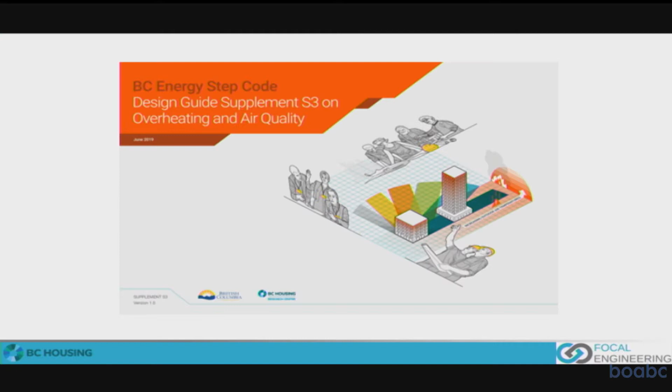So this is the actual supplement itself. It's freely available on BC Housing's website. It's a really nicely put together document — Hughes Condon Marler Architects has an illustrator on staff who does fantastic work, so it really helps present the information with nice, clear graphics and layout, easy to understand and follow. It's really nice work. That's the guideline, which is a directive for BC Housing.

It's all... social housing? No, not necessarily.

BC Housing has design standards and construction guidelines, which is the document that specifies their actual requirements. This is a supplemental guideline — it identifies the issues we're trying to address and some strategies for achieving those, without necessarily laying out requirements itself within the document. Wilma from BC Housing, please correct me if I'm wrong... Yes, that's right. So if you go to the BC Housing Research Center and just type in 'energy step code,' this will show up.

Let's start with a little bit of background as to why we even built this resource. The climate is changing. We know that, I hope we all agree on that. The climate is definitely changing, but how is it changing, how much, and how will that affect how buildings are designed?

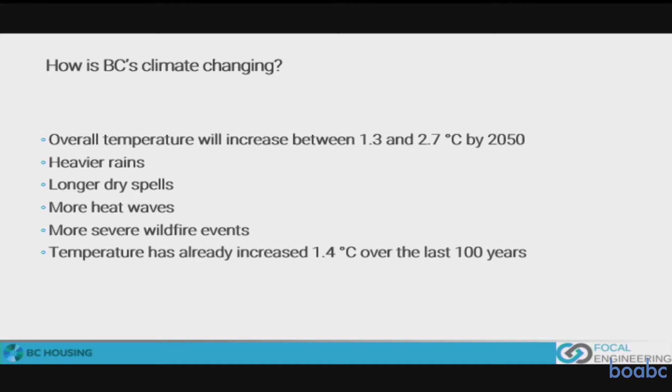We have an overall temperature increase projected between 1.3 and 2.7 by 2050. The range there we'll talk about a little later in the presentation. There may be heavier rains, longer dry spells. Certainly I feel like I've experienced that. I live in Victoria, and in the last few years there have been some moderate drought conditions, even on Vancouver Island, which you'd think would be full of rain, but not necessarily.

More heat waves, and I think that's particularly of interest for the design for overheating, because even if your overall climate is fairly cool, if you do have that one extreme heat wave, that could be a problem. So we need to be aware of that. More severe wildfire events, definitely happening. I think we're all pretty aware of that with the smoke in the last couple of years. And of course, we have evidence that the temperature has already been changing over the last 100 years.

So what does this do for buildings? How does this relate to how we design and occupy buildings? Well, there are certainly some occupant health and safety concerns. You have issues with potential overheating, you could even have people die, right? If you have someone that's completely overheated and unable to open their window or get help, if they have perhaps compromised health already. You have impacts on energy consumption.

As the climate changes, you maybe have some more cooling energy or fans, et cetera, or maybe less heating. That's another thing to think about too. You have some financial risks to building owners, particularly related to costs of upgrades later. Like maybe a building wasn't able to provide adequate air quality or comfort. They may need to retrofit that building later to provide cooling. That would be an additional cost, not to mention other issues related to more extreme events like heavy rains, et cetera, that might actually damage buildings.

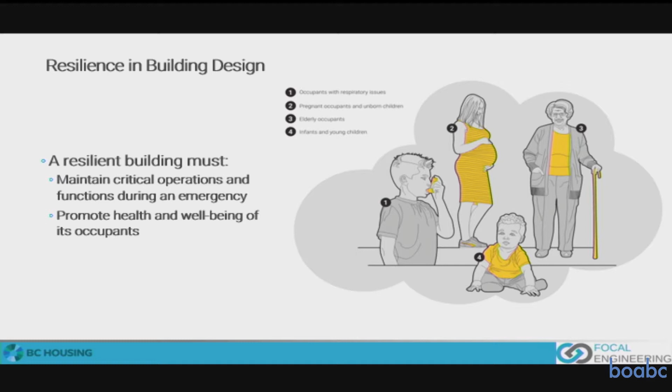In developing this guideline, there was a lot of discussion around resilience in building design. I didn't exactly know what that means, and I still think it's a little bit of a nebulous term. Resilience in what way? I think a building could be resilient to either extreme weather events, it could be resilient in terms of structure, it could be resilient to fire.

But of course, then you're looking at resilience in terms of its ability to house its occupants in a safe way. So you may be looking at having ways to mitigate smoke events getting into the building, mitigating overheating. One issue that gets talked about is that every building, or with a multi-unit residential building, for example, if it did not have cooling, then there should be some portion of the building that can act as a refuge during a heat wave event. So those are the types of things that come up when we talk about resiliency in building design.

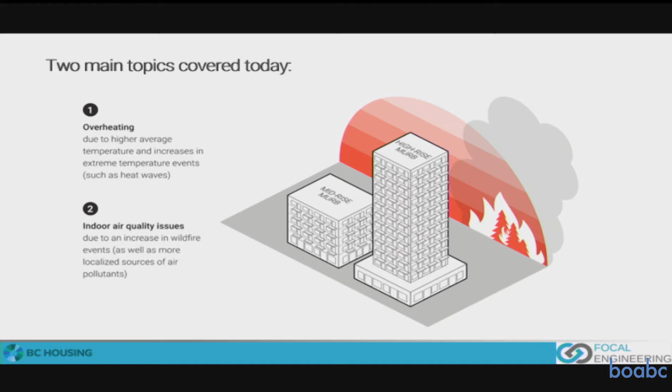So we'll start with overheating. What is overheating? I think everyone understands, yes, too hot. But too hot, how hot is too hot? And how does this happen?

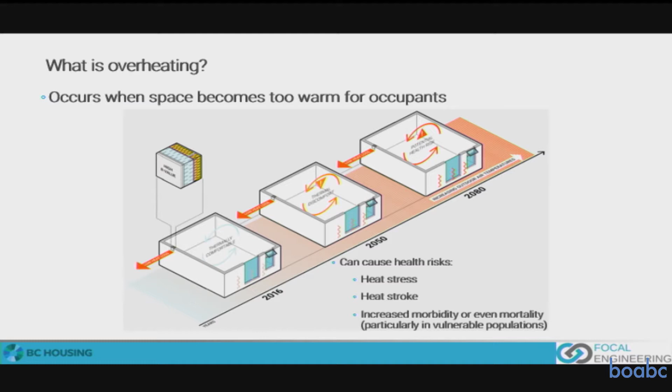We're thinking about this through the lens of not only current climate and building design, but future climate and changing building standards, and how those two intersect and maybe create additional risk for overheating. In this diagram we're looking at an increased performance of the envelope. Maybe it traps more heat in the building and the climate's getting warmer. These two things create a potential risk for additional overheating in buildings we're designing and building today and in the future.

Generally, we have internal gains. These are all the things generating heat inside your space. You have cooking, your microwave, your fridge, your water cooler, computer. Those are all plug load internal gains. Those aren't things we can necessarily control; people will have these in their buildings, and that's just the way it is. You can't really cook, especially with an electric stove, with any less energy than it already takes.

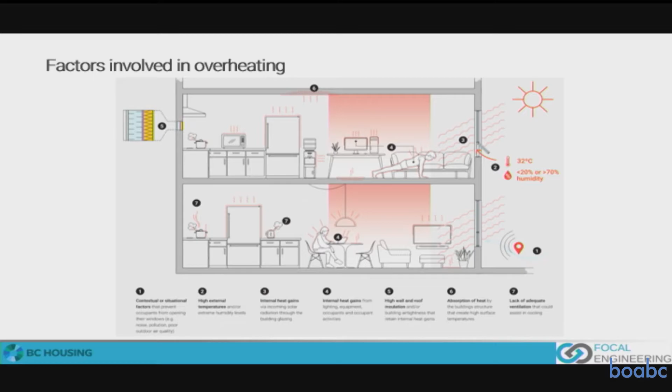If you talk to some people, myself maybe included, I might argue that adding more insulation to a building may not necessarily increase the risk for overheating. If you talk to people that design passive houses, they would say there's no additional risk for overheating in a building like that. That's not necessarily the case, and I've actually played around with some simulations myself to evaluate this. But the general concept is that there is a risk that with a more insulated building, you will retain more heat, and then you can have more risk for overheating.

But what it really comes down to is, are you able to get rid of that heat at night? If you have a building that you're not able to cool down at night, it will start the next day warmer, especially if it was more insulated, and then you'll be at a deficit - starting at a warmer temperature and overshooting higher. So it's not always an additional risk, but it is something to consider and understand.

If you have a passive house all designed properly, ventilated with air pipes, you don't have interaction with outside air, which is harder in summer. So in a way, I don't know how it relates with the insulation, because a passive house will have that kind of insulation - probably not the regular ones where the code isn't even required to have that much insulation. But in a way, what is the scenario here?

If that is not passive house, but it just design over insulation more than what is required, then probably this adds to the overheating aspect? It has a potential to, yeah. I think that's the main message, is that it's one of the factors included. It will affect how much heat is left in the building or is conducting in from outside. It could help in that case too. Like if you have a lot of thermal mass in your building and you're able to keep it cool by night ventilating it, letting it cool down to the outdoor air temperature at nighttime, and in the daytime if you're able to close your windows and keep it tight, then it'll stay cooler. So it could be a benefit.

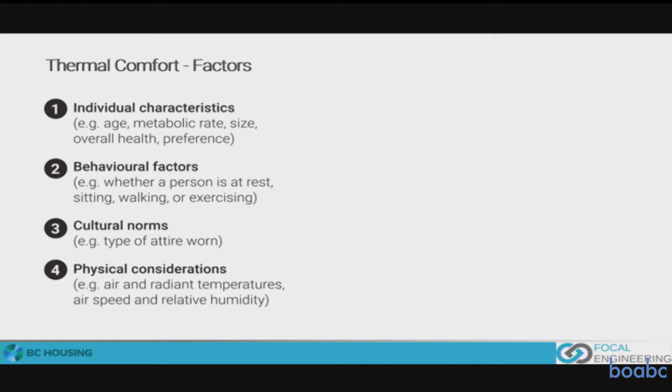So thermal comfort is, I think, quite an interesting topic. There's a lot of science involved because ultimately it's a perception thing. Like why do I feel warm or cool when someone else doesn't? It has to do with your age, your metabolic rate - some people run a little hotter than others. It has to do with your behavior, your level of activity, and of course how much clothing you're wearing. Some people wear different levels of clothing for a variety of reasons. This all affects heat transfer and what we perceive as our own thermal comfort.

Some of the physical considerations are, of course, we typically talk about air temperature, but air temperature is actually less important for your perception of thermal comfort than radiant temperature - the temperature of the surfaces around you. The reason we can use air temperature alone as a metric is because in most places like this room, the surfaces are all going to be more or less the exact same temperature as the air. If you're next to a window, however, in the wintertime that window will be cooler and you'll feel colder; in the summertime, conversely, it'll get hot in the sunshine. So there's a lot more to it than just air temperature, which is good to know, although using air temperature as a proxy for total thermal comfort is acceptable in most cases.

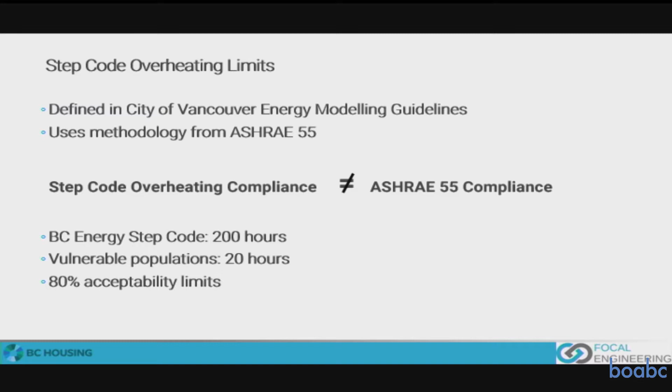The truth of it is that it becomes very complicated to try to delve into all these factors. So as a result, the STEP code has introduced some overheating limits. These overheating limits are sort of a modified thermal comfort metric that's based on ASHRAE 55, a standard for thermal comfort of occupants in buildings, but it is not equal to it. So that's an important distinction - sometimes we have that confused. We've seen some clients saying, oh, we need it to be compliant with ASHRAE 55. Well, if it's a STEP code project, no, that is not the requirement, and it's good to understand the differences between them.

The BC Energy STEP code has a limit of 200 hours, and again this is summarized in the City of Vancouver modeling guidelines. That is the upper limit - you're never allowed to have more than that. We'll talk about what these hours are. There is also some language in there for 20 hours of overheating for vulnerable occupants, so maybe an assisted living facility or something like that, where you want it to be a bit more comfortable since some people may be more at risk.

These limits are generally based on an 80% acceptability in ASHRAE 55, which means that 80% of people will say that's more or less okay, but that's not everybody.

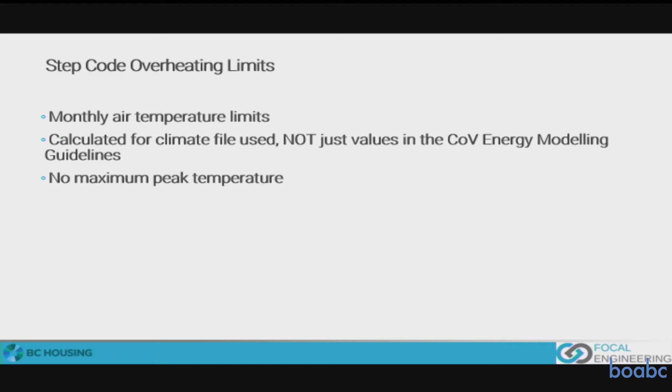So the way that these are actually determined in practice is that there's a calculation that looks at the average air temperature in a month. Based on that, and this calculation from ASHRAE 55, you come up with a maximum temperature for that month. The idea here is that this changes throughout the year because humans are pretty good at adapting. There's a lot of research that shows adaptive comfort models are very useful and accurate. So we're more accepting of a higher temperature later in the summer because we're more used to it. Similarly, if you lived in a hot climate, you would be more accepting of a higher temperature.

The other thing to point out here is that the City of Vancouver modeling guidelines that talk about overheating limits list values for each month, this is what your limit is. If you're not in Vancouver, those are not the right numbers.

So your modeler needs to calculate those from the climate file that they're using. That's important for building officials to know, so in the reports you're getting from your modeling team, if they're listing overheating hours, it should also state where those overheating limits came from, and you should double check that they align with the climate file.

It's based on the actual climate file. So the process would be, here's your project, say it's in Grand Forks. You go to Grand Forks, look on a map. There's a website called EPW Map that shows weather files on a map, and you find the nearest CWEC 2016 weather file. That's the type of weather file we're mandated to use for step code modeling, and you use that file for modeling that location.

It's not necessarily one climate zone per climate file. In fact, you have a huge variety of climate files for one climate zone.

Another note is that any hour a room is over the limit is counted as one overheating hour. There's no consideration of how far over, no maximum temperatures given. So even if your overheating limits are met, you may still have peak temperatures for a few hours or a day that could be problematic. That's something else to consider if you have a location with big spikes.

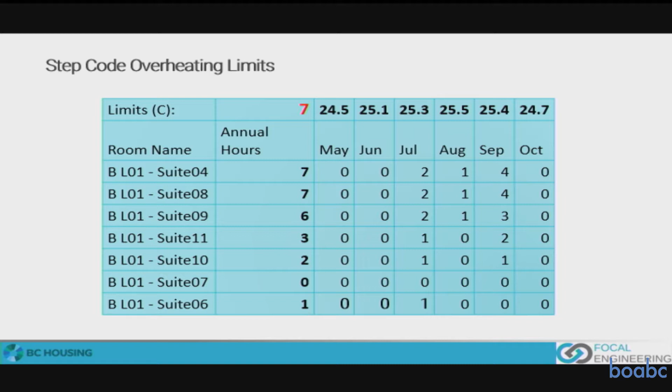So the limits are reasonable, 25 something. I think in Vancouver they get up above 26. You're looking at, for each month, for each space, how many hours is that room above the overheating limit, and what is the total annual hours. Then for the report for the entire building, we report the single worst space. So in our analysis we do the overheating analysis, figure out our worst case scenario, and then look at strategies to mitigate overheating in that space and any others that might require it.

A lot of this work has been talking about future climate modeling because, again, we're using data from the past 30 years for our current climate files, but we know the climate is changing.

So there are generally 3 different scenarios we look at. These are the RCP scenarios, 8.5, 4.5, and 2.6. The 2.6 is best case, if we really get our stuff together and make changes to our carbon emissions. The middle case is kind of business as usual, or maybe with some reductions, I'm not entirely sure. And the 8.5 is our worst case scenario. Of course there are so many different scenarios, we can't predict the future, but generally these 3 are what's talked about in modeling future files.

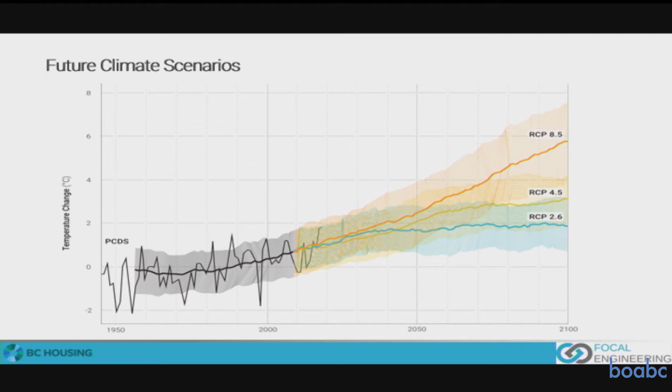So where do you get these files? You can get them from the Pacific Climate Impacts Consortium, an organization based out of UVic. They've created algorithms to morph climate files from locations into future climate files for all of those different scenarios, and for different time periods, 2030s, 2050s, 2080s. There's a lot of good data out there and more coming. ClimateData.ca and WeatherShift are also good sources.

This is becoming something we're seeing quite a bit of interest in. It's almost something we're providing as a standard analysis, even if it's not being asked for. We think it's best practice to say, in order to model for step code, we're mandated to use these modeling guidelines, which include a specified weather file. But we know that weather file is based on the previous 30 years, so it's already out of date. So we can also run a couple scenarios with these climate files, because it's fairly easy to do, and just give some sense to say, here's how things might change in the future for your consideration. We can look further into it once we've done that.

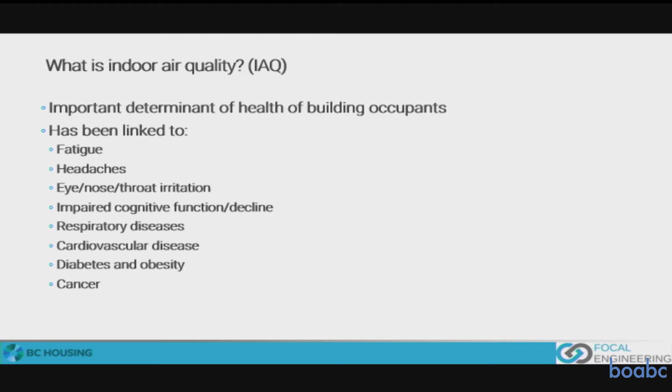Okay, now on to indoor air quality. I think it's pretty straightforward, it's very important, right? We need good air quality because we breathe all the time, and if we're in a contaminated environment, that would have some direct health implications. So it's very important that we have good air quality. Based on our lovely list here, it's been linked to pretty much everything bad that can happen to you. So you've got to make sure your air is good quality.

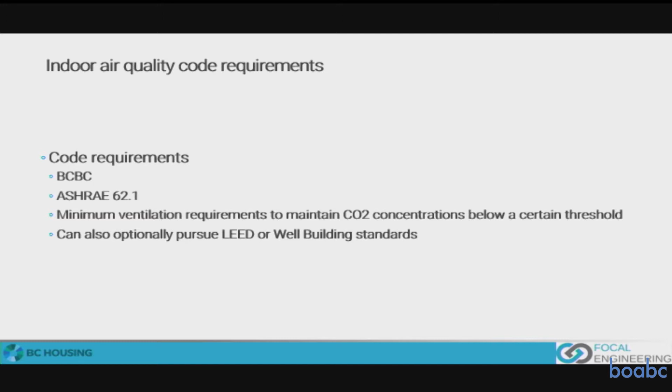In terms of code requirements, I'm not aware of any specific requirements for indoor air quality in terms of the contents of the air, like parts per million or VOC content. Of course, there are other standards, like LEED, which talks about indoor air quality testing for volatile organic compounds from interior finishings and off-gassing. But other than that, generally we're talking about just providing a minimum fresh air supply to a space based on ASHRAE 62.1 or the Part 9 requirements for residential suites and single-family homes. So there are some standards out there, but not necessarily for indoor air quality testing of the contents of the air.

So what are the things we need to think about with indoor air quality? We have a variety, generally indoor pollutant sources and external pollutant sources. Indoors, we have cooking, cleaning products - that can be a bad one - and material off-gassing. I think generally industries are producing more and more products that are aware of these things, and they've been highlighted through programs like LEED.

External things - traffic could definitely be an issue, big trucks going by, blowing black smoke from the diesel. Industry too - like I was just out mountain biking near Duncan, and of course the pulp mills there, it's pretty evident with the smell they give off that there's something in the air.

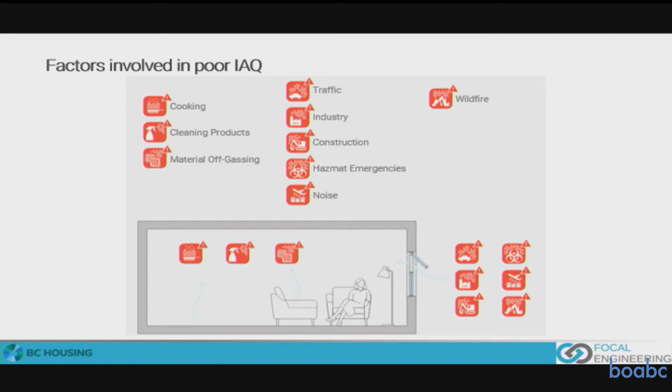Construction - you have some dust issues from construction, they get tracked around by trucks and blown around in the summertime, so that's another contamination source. Hazmat emergencies, that could definitely be an issue. I actually, a long time ago, worked for Kinder Morgan Pipelines, if you'd believe it, long before they became so controversial, and I was involved with a hazmat emergency there where there was a pipeline burst in Burnaby. It's definitely something that could happen.

And noise - noise is certainly one, particularly here, just think we're across from the airport, there's definitely some noise issues. I wouldn't call it an indoor air quality issue, but we've included it here because otherwise it would be all by itself. And of course, wildfire - wildfire is becoming more and more common as an issue. I had a friend of mine whose mother was very sensitive to it last summer, and it was a real problem. We needed to find ways to help her, filter air for her place and get an air purifier. It didn't affect me so much, but with her being older, it was definitely an issue.

So like I was talking about earlier, we have a variety of targets that we're designing towards, and sometimes designing for one may affect another. In fact, that's always the case - it's just a matter of how much.

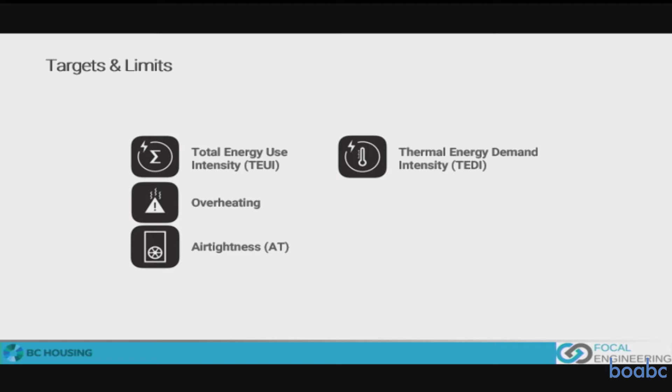So in the step code, for Part 3 buildings, generally we're looking at total energy use intensity - all the energy use of the building per unit floor area annually. The other one is thermal energy demand intensity, a metric looking at just the heating load of the building, regardless of how that heating load is met - so that's your total heating load divided by your floor area. Overheating, as we just talked about, is a requirement. And then airtightness. So a variety of different factors we're trying to meet, and sometimes they intersect opposite - you increase one and you drop the other, that sort of thing.

Okay, it's quiz time. So here's our building. We have a variety of strategies we're going to apply to this. We're going to go through and figure out how each of these measures will affect those targets.

Let's start with exterior shading. How is overheating and the TEDI affected with exterior shading? If you add exterior shades to your building, does TEDI go up or down, and does overheating go up or down? Overheating goes down, yep. And the TEDI? Goes up, good, I heard that.

You're right. There's a small caveat, though: if it's really well-designed shading, it may not make your TEDI go up, or at least not very much. Adding shading is great for keeping the sun out, but sometimes you want that sun in the wintertime for passive solar heating. So if you're not careful about how you design your shading, you can actually increase the heating load of your building. It's a trade-off: cooler in the summer, but less heat in the wintertime.

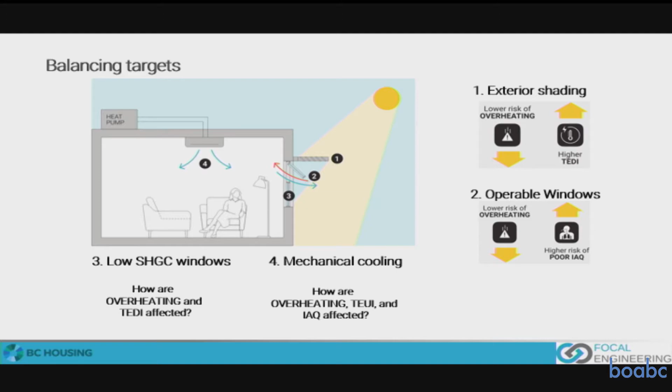Next, mechanical cooling and low solar heat gain. SHGC stands for how much solar heat the windows let in. If you put a lower solar heat gain window on your building, how does that affect your overheating and your TEDI? Harshan says same as before. Correct, it's pretty much the same thing—reducing solar gains helps it not overheat as much, but also doesn't help it get passively heated. I'd say exterior shading would actually perform better overall than low solar heat gain glass, because it blocks all the sun in summer but lets most of the heat in during winter, whereas low SHGC glass kind of blocks it all the time, which isn't ideal.

For mechanical cooling, let's say you decided that passive strategies won't work for this project for whatever reason, so you put in mechanical cooling instead. How does that affect your TEUI—total energy use—your overheating, and your indoor air quality?

So your indoor air quality, we're looking at the risk of the indoor air quality, which went down, so the quality is better. Lower risk of overheating, of course, because we have cooling, but it's going to cost us some energy. We don't need to open up the windows anymore, so we can have ventilation that can be filtered and controlled, and we'll have better air quality there.

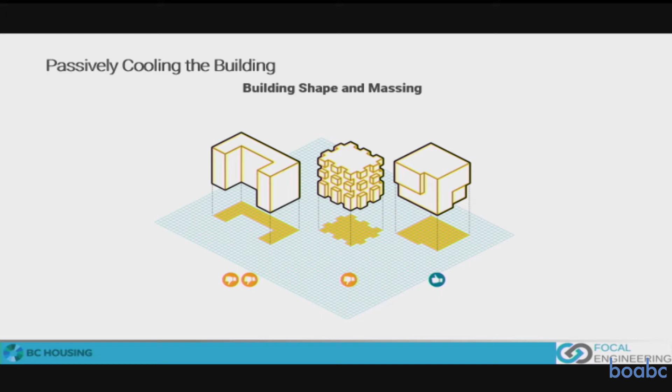For passive cooling, one of the main drivers is your building shape and massing. The orientation of your building has a huge impact on how much solar gain you have, which is one of the main contributors to overheating, if not the main one. The other thing this affects is how much availability or effectiveness you get from natural ventilation.

If you have a typical condo building in the North American market with a corridor in the middle and suites on either side, they call it the double-loaded corridor. For every suite, you only have single-sided natural ventilation, so if you open your window, it's not the most effective at cooling off your suite. Versus if you have almost a motel-style building with an exterior corridor and your suite exposed on both sides, you can open windows on both sides and have airflow right through with the prevailing wind, much more effective.

Building orientation, again, very important. It's not super obvious here, but we're looking at the long axis of the building. In the top left, the long axis is north-south. This is your worst case scenario—you don't really want to see this, because that long west face gets a lot of sun in the evenings, and that low solar angle sun is hard to deal with. You can't just put an overhang on it, because the sun gets nice and low in the sky, so you need to block it vertically, but then you're blocking views and it's trickier.

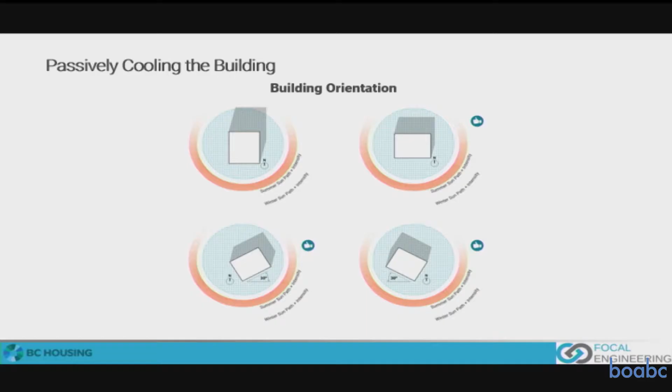Alternatively, on the top right, you can have your long axis going east-west. This is nice because you can use those overhangs we talked about—simple, effective, done. Hopefully you put your emergency stairwells on the ends of the buildings, without many windows on the short ends, so you don't have to worry about those so much. Of course, you don't have to have it totally east-west—you can have it a little bit off, like the bottom two, and that's still pretty good.

Which is the worst orientation—west-facing or south-facing? West-facing is generally the worst, because even without shading on the south side, the sun is pretty high in the sky in summertime, so your building facade and the sun coming down means a lot of it reflects off the glass rather than penetrating. Whereas in a west-facing building, around the heat of the day, 1 or 2 o'clock, in late June or early July, the sun is already pretty far around, and you get very direct, very normal solar gains—very intense and can be really bad. South is bad too without shading, it's just west is worse. Southwest is probably the worst if you really want to get to it.

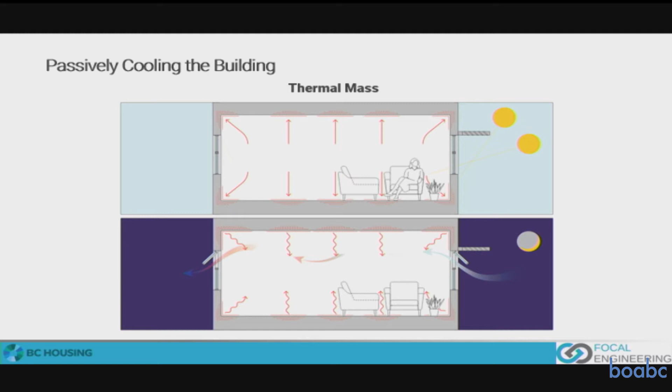Another way to passively cool your building is using thermal mass. This isn't necessarily cooling your building—it's more of a deferral of heat transfer. The idea is you have high mass in your building, like a thick concrete floor, or stone. In the daytime, that stone soaks up any heat in your building, like a big battery. As sun shines through onto the floor, it warms the stone up, which has a lot of mass, so it takes a lot of energy before it actually increases in temperature. Then at night, with your windows open, you allow the surfaces to cool off and discharge that battery, so it's recharged and ready to absorb heat for the next day. Very effective, very old technology, very, very good.

But of course, you don't always want to build with concrete—concrete has huge embodied carbon emissions, for example.

It's not necessarily always the right choice for the job, so I wouldn't say people are going to choose to build with high thermal mass just for passive cooling, but it's something that could be included, particularly if you're already building with concrete. Make sure that concrete is exposed so you can actually have that heat transfer between the space and the mass of the building.

I should point out here that mass timber, which is being talked about a lot more, can perform reasonably well as well.

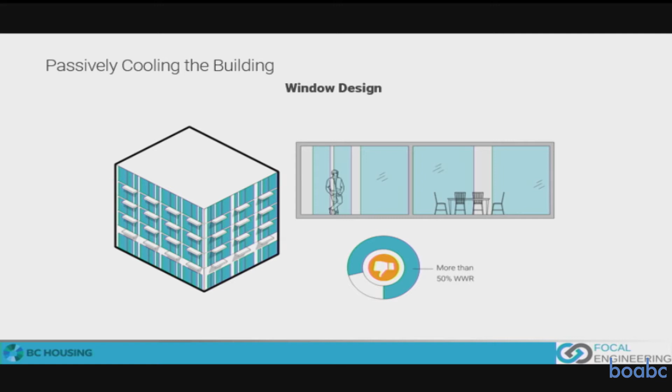In terms of passively cooling the building, what you don't want to do is this. You see a lot of these around Vancouver, and I'm sure they're not very comfortable in the summertime, with lots of windows. That's a real problem to overcome. So if it's important for the project to do that, just understand you're probably going to have to do quite a bit to address that, to overcompensate.

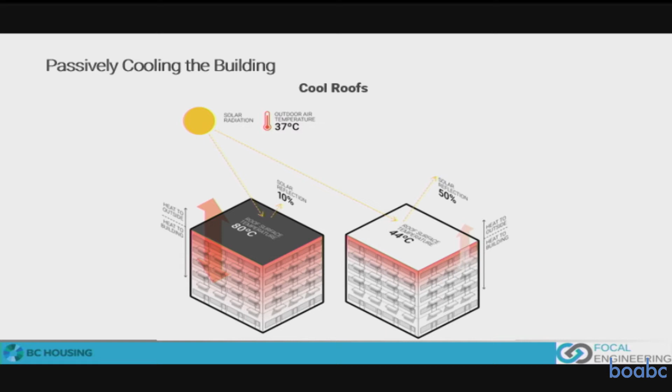Cool roofs are a good strategy as well, particularly for the upper floors. You can have situations where a dark tar roof gets very hot in the summertime with that sun, especially when it's high in the sky and coming straight down, and that can radiate through the ceiling. Even if it's well insulated, it can get through, and you'll end up with overheating issues because of that.

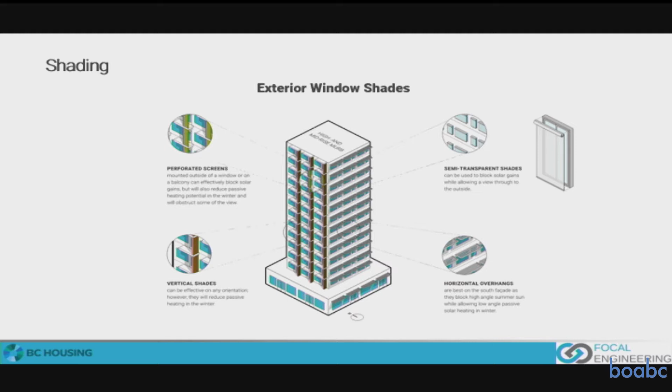And then we have some perforated metal screens or vertical shades on the west. That's another way you can deal with solar gains for the west side - instead of putting something directly in front like a roller shade, you can have a fin so that for the start of that afternoon, you're shading it, and then maybe you can accommodate some direct sunlight in the evening when the sun is lower and not as intense.

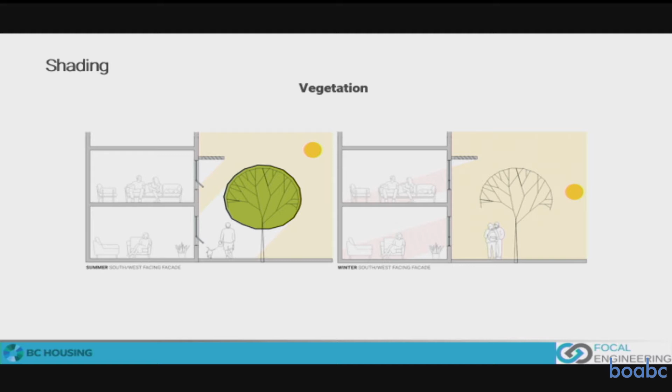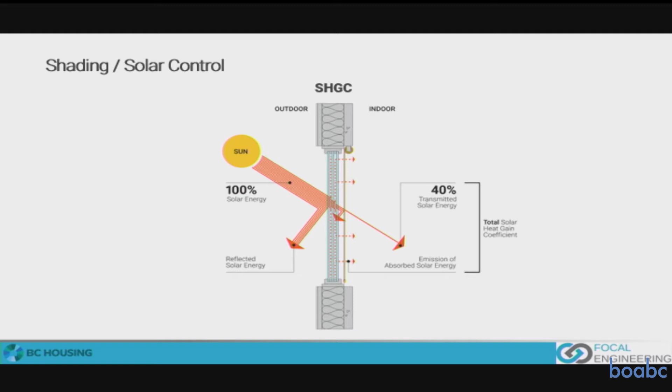Another key thing for all buildings being designed, regardless of your shading strategy, is the solar control of the glazing. There are a variety of coatings you can use on glass. It's becoming very standard these days to have some coating - not necessarily a dark tint that some people might associate with low solar gain glass. The coatings are selective so they block the infrared spectrum, which our eyes can't see. So to us it looks clear still, maybe has a slight color to it, but generally it's blocking - if you looked at it with a thermal camera it would look pretty dark, but not to our eyes. That's pretty standard these days.

Electrochromic glazing is something that's coming in. It's a really interesting technology. It's kind of futuristic, but it's actually not crazy. It does have some costs associated with it, but so do a lot of these strategies.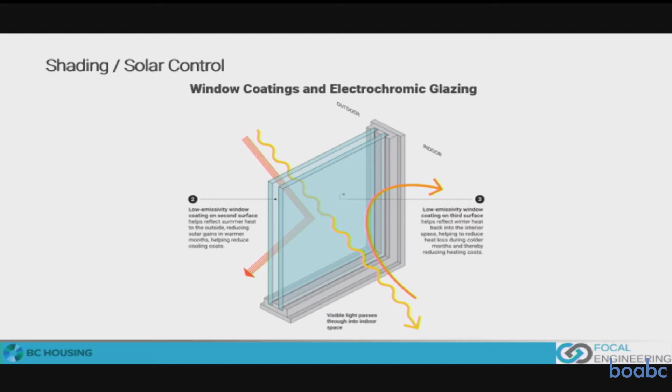This electrochromic glazing allows you to use a controller, and you can actually dynamically tint the glass. So you can change the tint of the glass and how much solar heat gain goes through it with a controller, and that controller can be set to respond to all sorts of different factors. One of the nice things about that for some applications is that it can also be pretty good for glare control. So if you have an office or something and you do want the heat but not the light for other reasons, you can tint it.

It's a good question, I don't know. I'm sure that if you talk to their sales reps, they'd probably say it lasts forever. But I know it's been around for a while, so they probably do have some good data on the reliability and long-term performance of it. To me, it seems like the cost premium to do it is fairly high, and it's generally more applicable for a cooling-dominated climate like California, where applying a technology like that would actually save you a lot in cooling costs. So it would sort of make sense financially. Whereas here, you could do it, and sure it's going to help you be slightly more comfortable, but it's maybe not consistent with the cost.

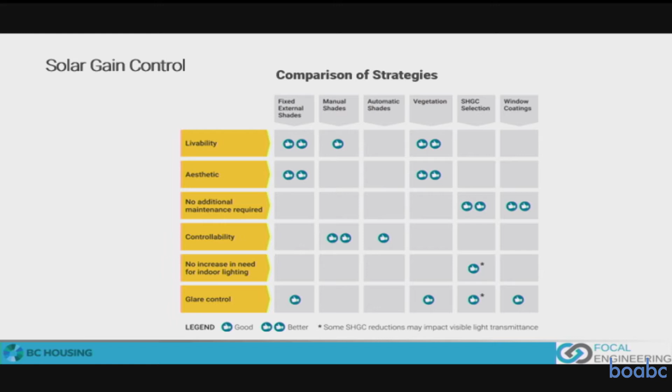So just a bit of a summary of some of the different strategies: 2 thumbs up, extra good; 1 thumb up, pretty good; otherwise neutral. I think we kind of talked about most of them - window coatings, solar heat gain, vegetation, etc. This is the sort of data or helpful information that's available in the guide, with some nice graphics showing this is pretty good, this is better, this is best, that type of thing.

So cooling by natural ventilation and using operable windows. I say operable windows because generally that's what we see it applied for - looking at residential buildings, typically Part 3 residential buildings, where we're looking to use operable windows to maintain some comfort in the suite. But this could be for larger commercial buildings where you have an engineered natural ventilation system, with openings at the exterior of offices, where air actually comes through the building and up to a central atrium where it relieves at the top of the building. We've worked on several buildings that use that strategy, and it can be quite effective for commercial buildings as well.

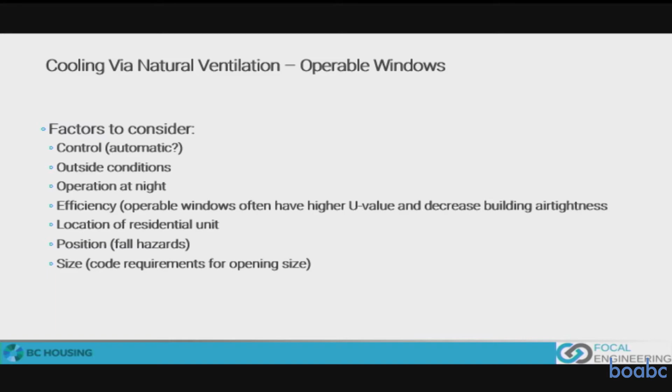So if you're designing for that, whether it's just simply saying, hey, sure, we want to have operable windows on our building - well, how much room do we need? What's the area that we need in order to cool it? That's something that your modeling team can help you figure out.

The location of it is definitely important. You need to look at fall hazards - a lot of the windows have limiters on them so that you can't just open up the whole window and have something fall out, or a person or a child. So there's a lot of things to consider. Again, we talked earlier about security risks and other particular reasons why you may not want to have your window open - noise is one of them for sure.

Okay, so here we have a little example. We did a 6-story senior housing in Vancouver Island, climate zone 4, quite mild. In the initial design, which was sort of our first cut, we didn't have any operable windows, no shades, basically no strategies whatsoever. We were at almost 2,800 overheating hours, so completely unacceptable - a health hazard. That's not going to be good.

What's that? Well, it did have operable windows, but just for illustration purposes we ran it with the windows not allowed to open. Yeah, that would be rough - I don't think I've ever seen a multi-unit residential building without operable windows. My office has a window in it, but it's not operable, and it's funny, the psychological effect of not being able to open it. Yeah, I feel trapped.

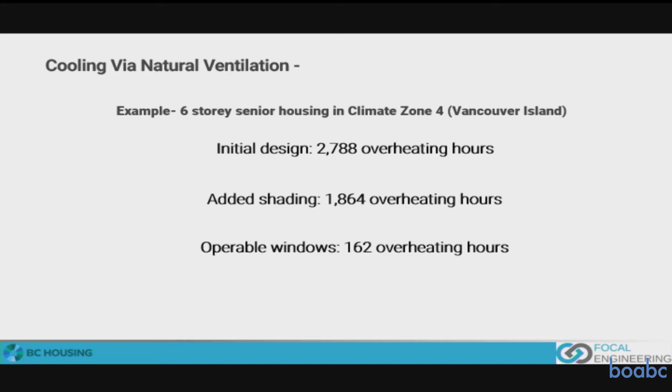The answer is yes, but limited amount of cooling. There you go, hybrid or partial cooling.

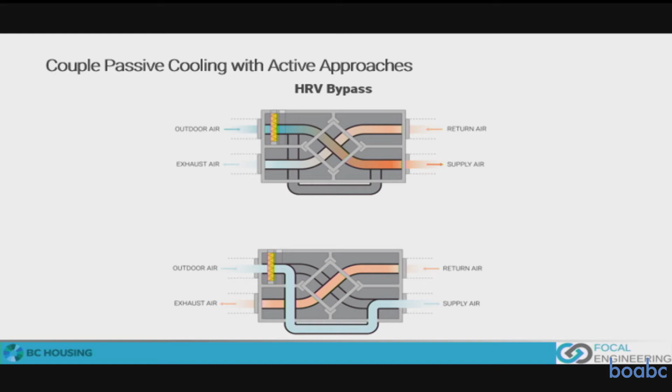One of the things to consider, particularly for residential buildings but also commercial buildings, is that with the step code we have some pretty aggressive limitations on heating targets, so the ventilation has to have heat recovery on it. When you do that, you run into situations where it may be warmer inside than outside, and you're actually recovering that heat from inside and warming up the outside air coming in. Even if it's not by a lot, it's not helping. So one thing to do is have an HRV with a bypass so that the incoming ventilation doesn't go through the recovery and pick up the heat from the exhaust — it just comes straight in from outside.

So this is the example you talked about: tempering supply air. Essentially, if you have ventilation provided to your suites, usually we're just tempering it for heating. But if we have a central ventilation system, we can put a cooling coil in that and provide air that's a little bit cooler, which can help take the edge off and improve comfort.

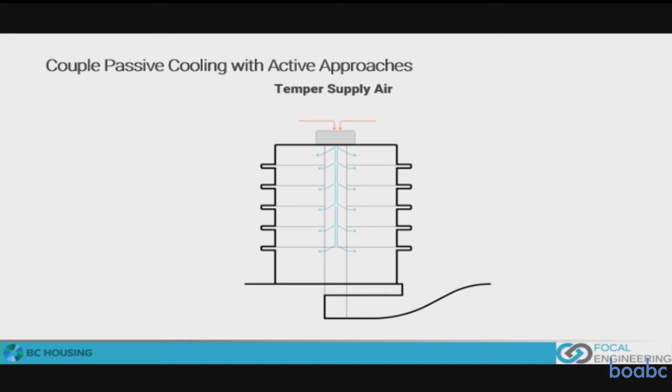So then, after you've done some sort of partial mechanical cooling, you can just go full mechanical cooling, which honestly is not a bad option these days. If you consider how marginal buildings today are in terms of comfort, and then look at some of the climate projections and expected lifetimes of the buildings, it seems prudent to at least allow for the expansion or addition of cooling later.

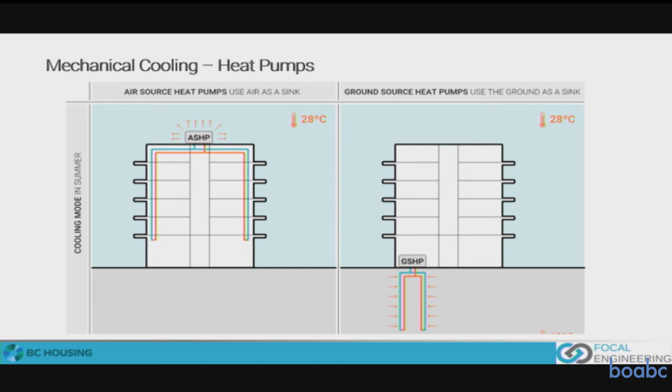So heat pumps are very useful. You can have an air source heat pump that's providing cooling to your building, or you can have a ground source heat pump. It doesn't really matter — they're just different technologies to move the heat from inside to outside, whether you're rejecting it into the ground or into the atmosphere, either one.

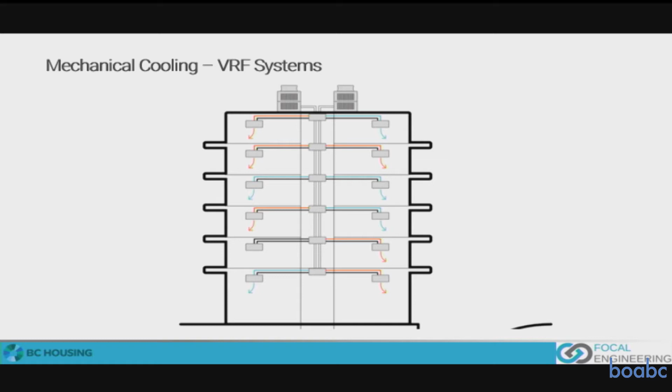VRF systems are becoming more common here, and very common in Asia. These essentially use compressors on the roof that move refrigerant through pipes down to the suites. The nice thing about these is that they can do simultaneous heating and cooling, and they actually exchange that heat. So if you're in a shoulder season — let's say you have a suite on the west side in September that needs a little bit of cooling, but it's still not that warm out, and the guy on the east side is pretty cold — there's some heat recovery.

In terms of total energy efficiency, VRF systems are really excellent. It's the sort of thing where if you're going to add in cooling anyways, maybe if you add in a VRF system, it can provide your heating at an efficient rate using the same piece of equipment. So rather than adding an additional piece of equipment, you just add in something that can do both.

Exactly, yeah. You have one compressor that serves multiple zones, and all of the zones can be doing different things — heating or cooling. Yeah, it's pretty cool. Variable refrigerant flow — it's not very descriptive.

But there are a variety of ways that these can be interfaced at the actual zone level. You can have a ceiling cassette, which just looks like a diffuser — I'm sure you've probably seen them even if you didn't recognize what they were. They're definitely around. Or there are things like a wall-mounted cassette, like you see in maybe a hotel room up high, that sometimes look like a mini split. They can do heating or cooling.

It is a heat pump — yeah, it's just a heat pump. It's just a fancy heat pump. It can do heat recovery from refrigerant to refrigerant, and different manufacturers have different ways of doing it, so it's kind of proprietary. People have been a little bit scared of them because of that, thinking they'll be locked in with one manufacturer for the lifetime of the equipment. But they're widely used, so becoming more and more common.

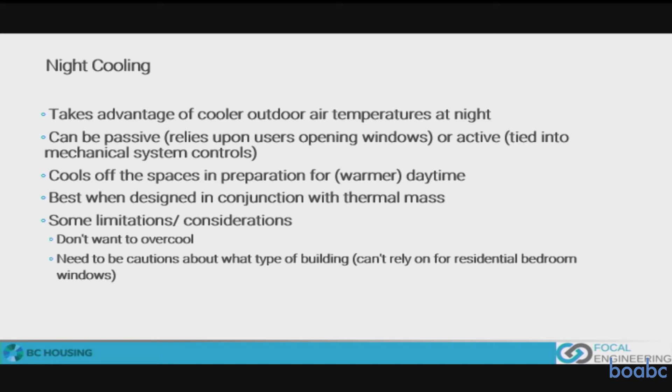This goes back to the overheating risk with additional insulation we talked about. If you weren't able to do night cooling, you would end up losing less heat through your envelope overnight. So your building heated up through the day, and unless you're able to open your windows, it's going to start warmer the next morning than it would have with less insulation. That's where that can be an issue.

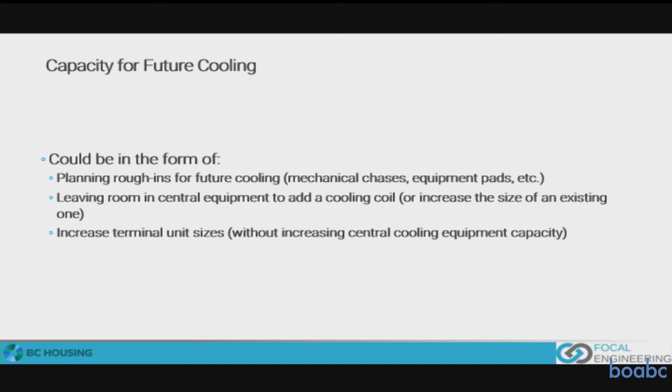And then, of course, capacity for future cooling, which isn't really doing anything now, but at least recognizes there could be a need for cooling in the future. So let's say as a building owner I didn't have the money now to install cooling, have it sit there and be used only a bit, and then it wears out in 10 or 20 years. Maybe it would be best just to put in allowances for it in terms of power supplies, conduits, and ducting. Then down the road, if it turns out you need it, it would be much less expensive to put that in.

The HRV with the bypass option—can that be a retrofit in an existing HRV? No, the HRVs either come with a bypass or not. They wouldn't have the room for the bypass. It would require additional size in the cabinet to actually have a route for the air to go around the core, plus the controls to do it. So it wouldn't be something you could add on. There might be a sneaky way to do it though.

If you have heat pumps, which are kind of efficient during winter and summer—cooling in summer and heating in winter—do you still use an HRV? Yes, yeah, yeah. So you would still need the HRV for other reasons.

So regardless of all of these strategies, these are all in the context of step code. Step code targets have a real emphasis on minimizing heating load, and one of your biggest heating loads is ventilation. So it's very critical that buildings have heat recovery on ventilation in order to meet the step code targets.

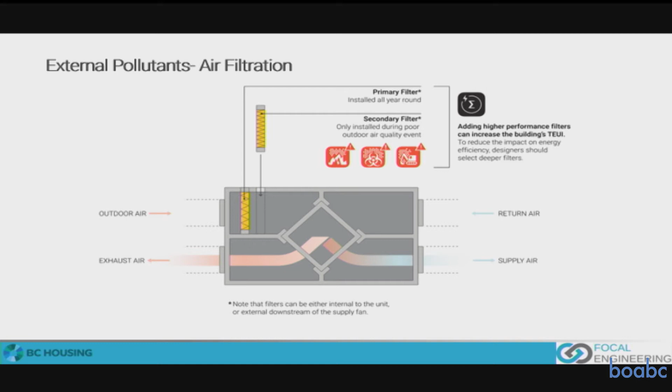Filters—I'm not sure how common this is, but it's certainly something that could be done, and I'm sure there's the possibility with products on the market today. Personally I haven't come across it yet, but there's been talk about this, or at least it's one idea. You may not necessarily have an air quality issue now, but if you were concerned about it—let's say you had an intended occupant sensitive to poor outdoor air quality—you might want an allowance to put in a higher performance filter, whether that's a MERV 13, 14, or higher, a HEPA filter, or activated carbon. Any of these strategies could help improve your air quality inside just by filtering the air from outside.

The other thing to think about is using a dedicated outdoor air system, basically a 100% outside air system rather than a recirculating air system. If you're using a recirculating system, you may be picking up internal contaminants and reintroducing them into the space. So using just fresh air and then exhaust would be potentially better.

Do you have a question?

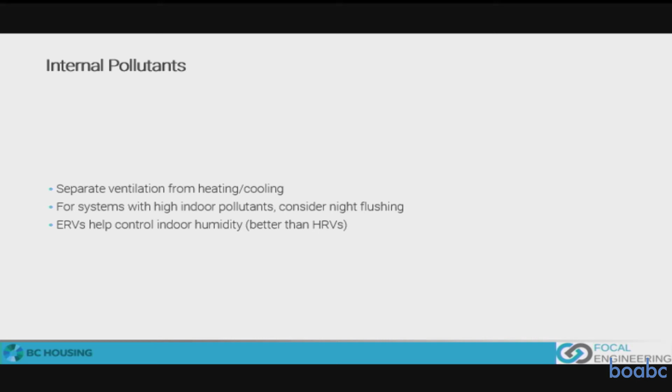So again, as to the last point, dealing with internal pollutants—using a dedicated outdoor air system lets you separate your ventilation from heating and cooling. This is good for energy performance as well as for not introducing more internal contaminants back into the space.

Okay, so we're getting close to the end here. I do have a couple examples, but I'm a little bit ahead of schedule. So just so far, how's everyone doing? Do we have any questions?

So we talk about step one now, is HRV required? Is that what you would require HRV in houses, or is this just talking about... So I would say yes, a house would require an HRV for a Part 9 step. I would think so, but I don't know for certain because I don't work in Part 9.

But just looking at the targets, I mean there shouldn't be much difference—it's the same building physics that's happening. You essentially need HRVs for pretty much all the step code levels for all buildings; it's just kind of a given. There might be some cases where you may be able to get away without it, like at step 1, because targets there are kind of different—you're not modeling against a TEDI target, you just have a reference building. And the reference building is frankly really poor.

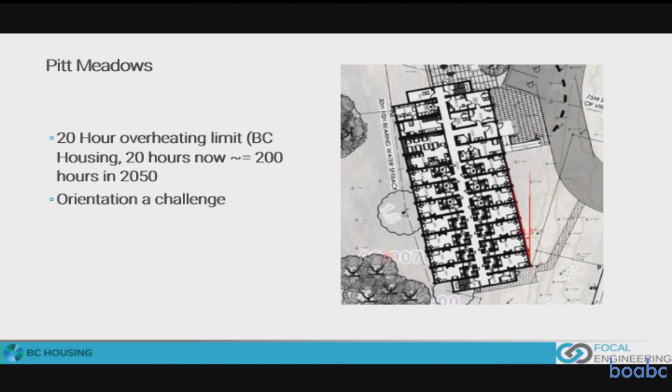For this project we had a challenge with the orientation - I think this is pretty much our worst case scenario, with the west face being the long end of the building facing west. So we looked at some different options.

We have central ventilation, and we looked at adding a cooling coil in the central ventilation system, using basic ventilation rates, not increased rates. It wasn't bad - we got it down to 66 hours. Not down to 20, but pretty good, so we felt good about that, especially given the exposed west face.

Just to double check the impact the cooling coil was having, we turned it off and ran it again, and ended up with 235 hours. This is also in conjunction with people opening their windows - so they're receiving a bit of cool air, but they're also able to open their windows.

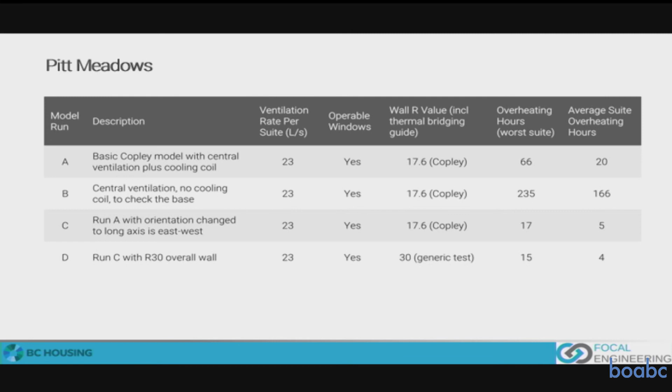So then looking at the orientation, I rotated the building so that the long axis was east-west, and this is where we achieved 17 hours. So yeah, we made it under the 20 with a partial cooling solution. We're pretty happy with that.

This project is still under design, so we may end up doing some other shading strategy rather than rotating the building. It may not be possible on the site, but at least we were showing that if we control the solar gains appropriately and add that cooling, it is feasible to get underneath the 20 hours.

And then as a final run, just to double check, and this goes back to the insulation, I increased the insulation value of the wall just as a test. Is that going to impact it? Because we were using a similar model, not this model, and this model is going to have a much better envelope, which we hadn't detailed out yet.

So it turns out in this case, it wasn't actually worse. It was actually slightly better for overheating with a more insulated building. But again, this is with our optimistic, optimal control strategy on the operable windows, where they're being opened and closed exactly when they need to be, which is not necessarily realistic. It's feasible, but not realistic.

So just before we finish up here, just to recap, hope you guys have picked up some of these things - understanding a little bit about how the step code looks at overheating, in terms of it being these upper limits, that's not ASHRAE 55. How this is different from previous code - as far as I know, we didn't have an overheating limit of any sort. Maybe some local jurisdictions like Richmond had ASHRAE 55 requirements or something like that, but otherwise I don't think there's anything there.

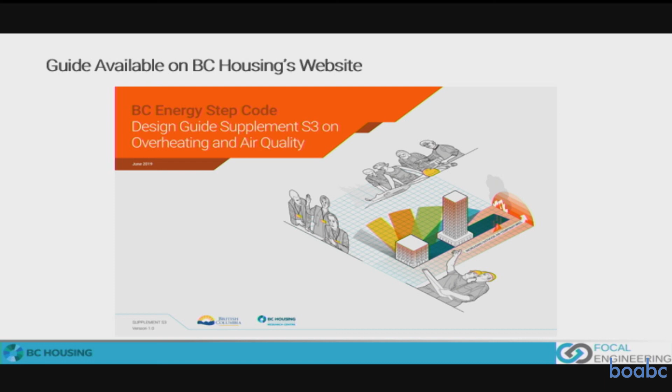Just a reminder that the full guideline with much more detail about this topic is available on BC Housing's website. And that's time for some questions.

We answered them all along the way. On the line, is there a sample report - like what the issue is? I believe that we're working on one. That's good to hear, because it means it's going to be something that people are interested in.

Yeah, exactly, because there's some methodology about it too - how do you do it, how do you evaluate it properly? We've spent some time looking into it, and there's been other people working on it as well. So we're going to pool those resources and make sure people have a bit of a guideline as to how you go about evaluating this, and what are the outputs you're looking for.

Just wanted to let you know, Focal Engineering had given a report on a BC Housing project. We are using this as a template to develop a report format that can be used by others. We already have gone through that process, so we are now preparing something to share.

Is the BC Housing project designer responsible for employing an energy modeler to specify the heating, air conditioning, air modifying system?